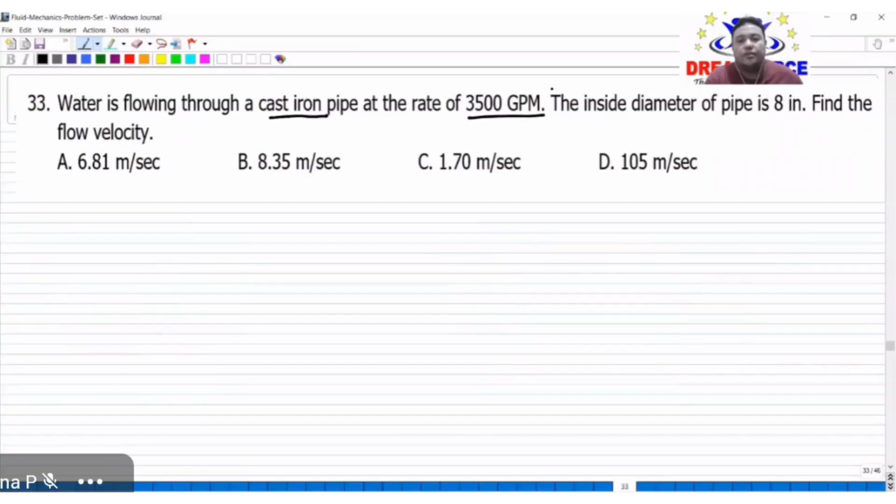Number 33. Water is flowing through a cast iron pipe at the rate of 3,500 GPM.

GPM is your gallons per minute. The inside diameter of the pipe is 8 inches. Find the flow velocity.

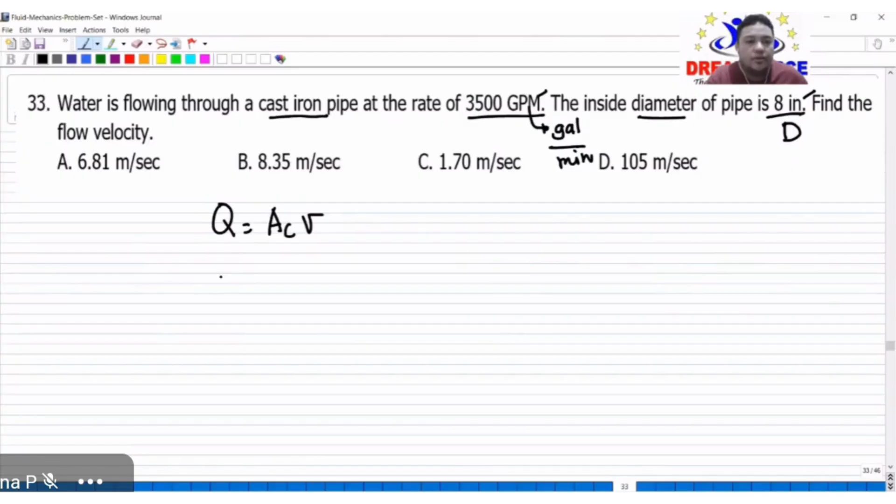Take note, we have discharge and cross-section, which is our diameter, circular. So find the flow velocity. Your Q is equal to cross-sectional area times velocity. In terms of velocity, V is equal to Q over our cross-sectional area.

We want our gallons to become SI. What do we know about gallons? In 1 cubic foot, that is equal to 7.48 gallons. That's our conversion factor. We already know feet to meter, so that's not a problem. Therefore, this is 3,500 gallons per minute.

Let's make this cubic feet first. In 1 cubic foot, that is 7.48 gallons. What else do we need to do? This should become SI. In 1 meter, this is 3.28 feet.

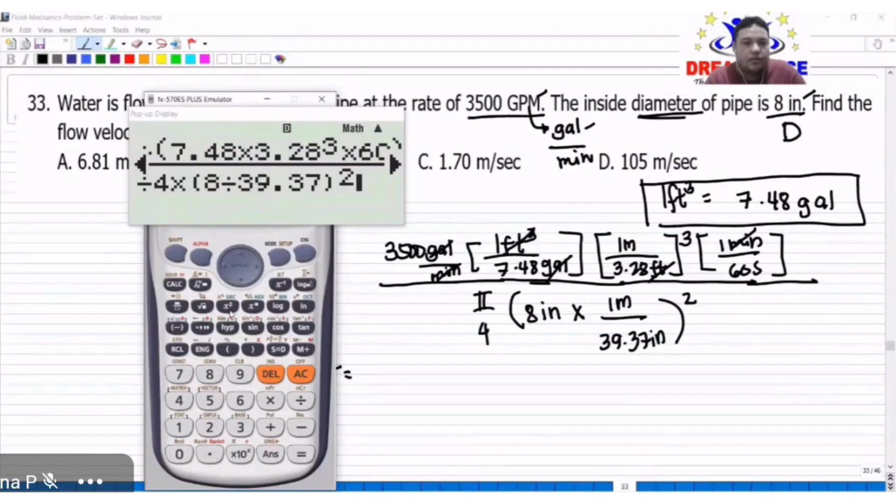All over pi over 4 multiplied by the quantity 8 divided by 39.37. So this is now equal to 6.81 meters per second. That is letter A.

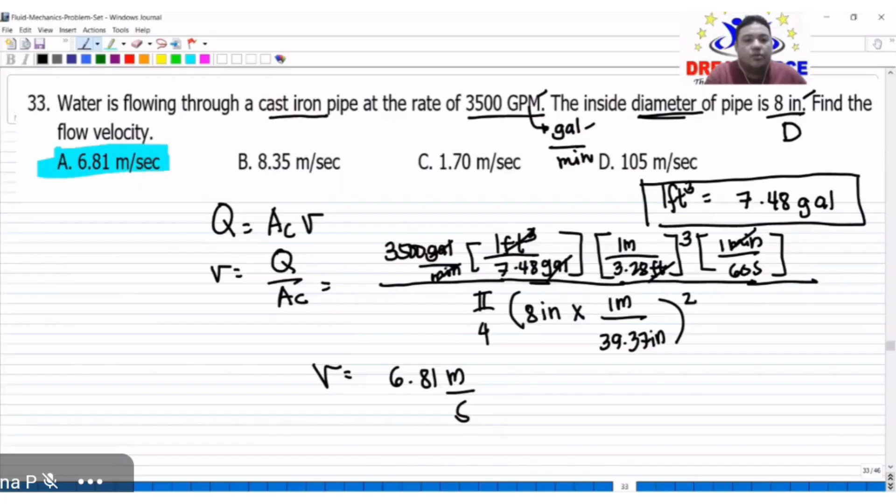Let's move on to the next problem. But before this, let's discuss the concept of head loss. Take note, what we've been discussing is fluids moving in one direction only - there's no change in direction.

But take note, in reality our pipes have many turns and bends. The fluid moves until it reaches its destination, and there are many bends. And take note, when the fluid flows and there's a bend, there is a corresponding friction between the fluid and the bend itself.

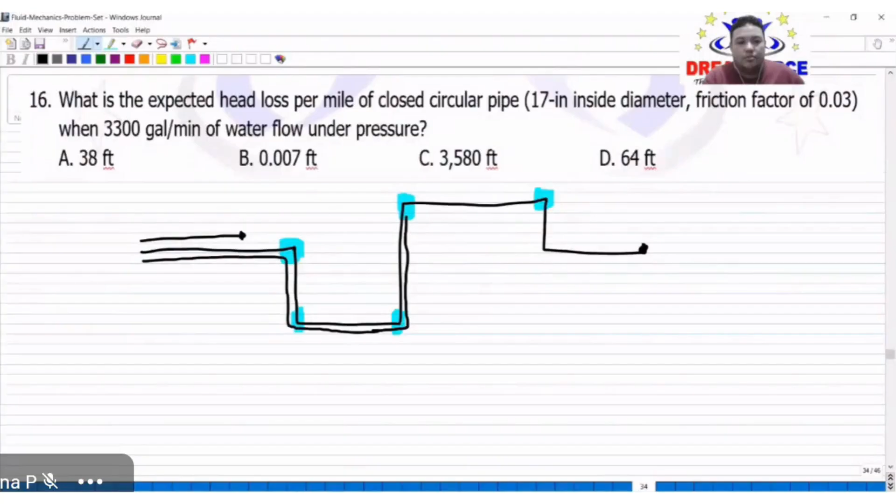So naturally something resists the direction the fluid wants to go. Instead of going straight, it follows the direction of the pipe. Therefore, there is friction here. So the friction, or the energy lost due to the fluid bending, this is what we call head loss - head loss due to friction.

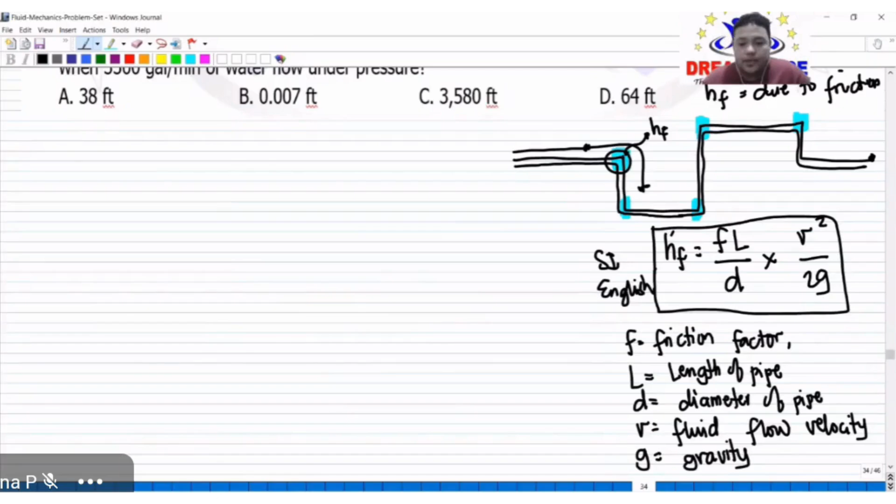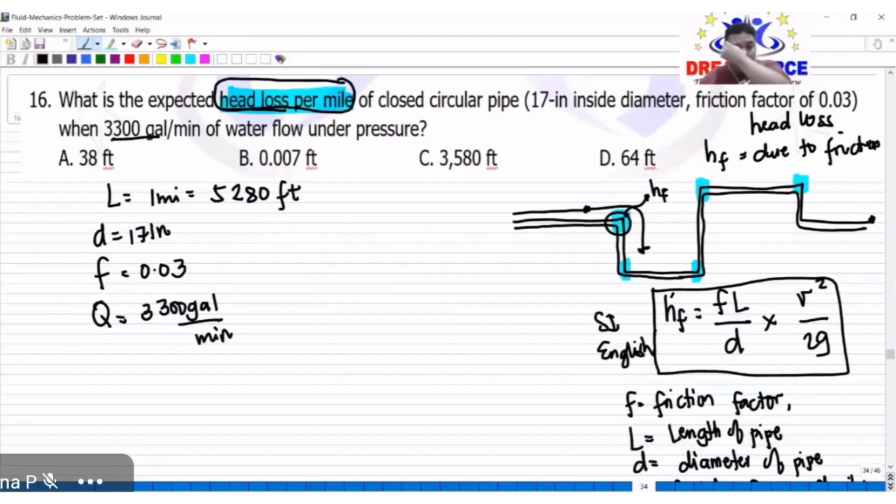What is the expected head loss per mile? Take note, head loss per mile. So from this, we know that we're computing per mile. What is the length of the pipe here? The length of the pipe is 1 mile, or in feet, 5,280 feet, of a closed circular pipe, so D equals 17 inches inside diameter, friction factor 0.03, and our Q, given as 3,300 gallons per minute of water flowing under pressure. So what we're looking for is head loss.

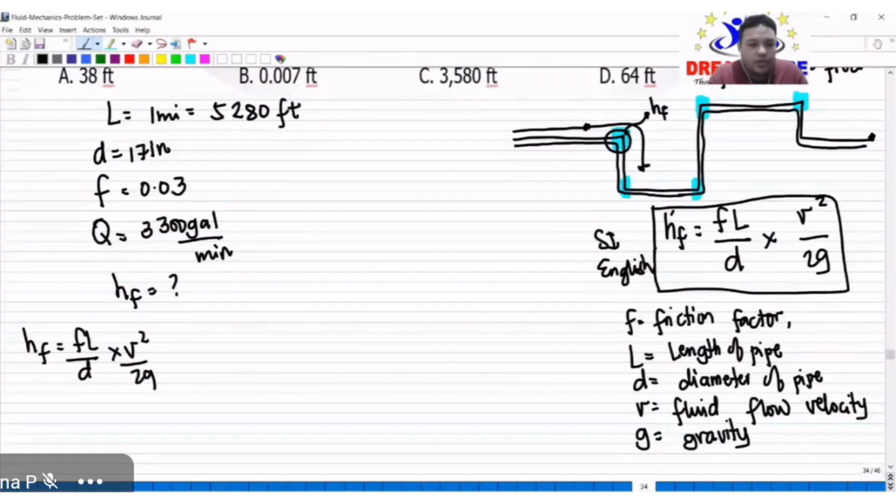What is head loss? That is HF equals FL over D times V squared over 2G.

Let's get HF. This equals friction factor 0.03 multiplied by our length, 1 mile, 5,280 feet, all over our diameter, which is 17 inches. Let's convert it to feet, since our units aren't compatible.

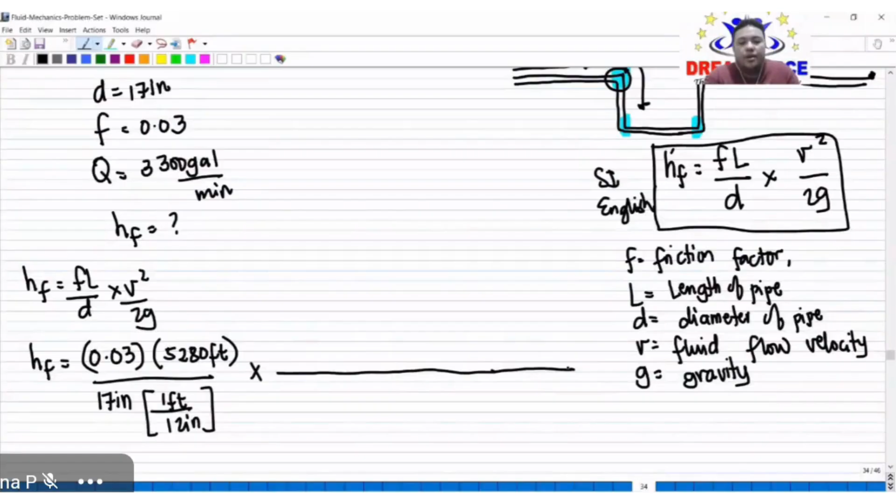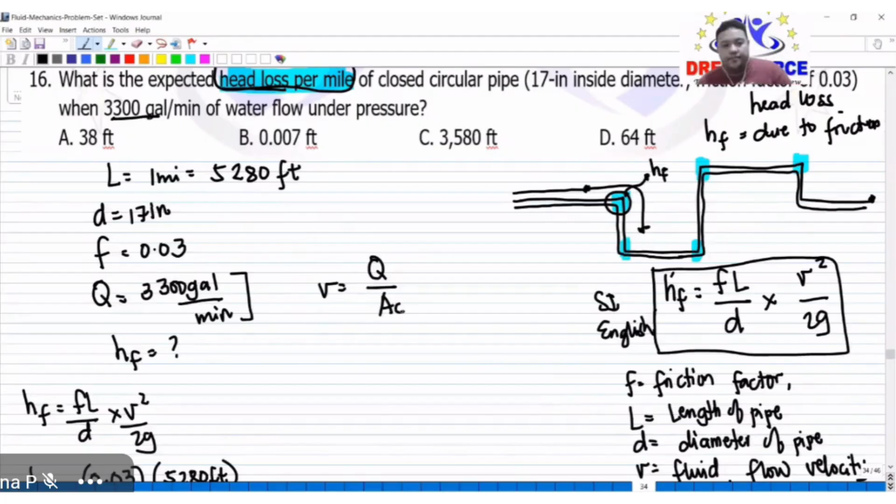Multiplied by the quantity: in 1 foot, that is 12 inches. Multiplied by... we don't have V yet. But take note, where can we get V? What parameter? Discharge. So what is V in terms of discharge? That is Q over cross-sectional area. So our V here is now squared.

We square all of this. So times the quantity - let me enlarge it. This is now multiplied by our Q. But our Q is 3,300 gallons per minute.

This needs to be in English units, so what do we do? We just convert. Multiplied by: in 1 cubic foot, that is 7.48 gallons. Then what else do we do? Convert the minutes to seconds. In 1 minute, that is 60 seconds. So is that discharge now? Cubic feet per second? Yes.

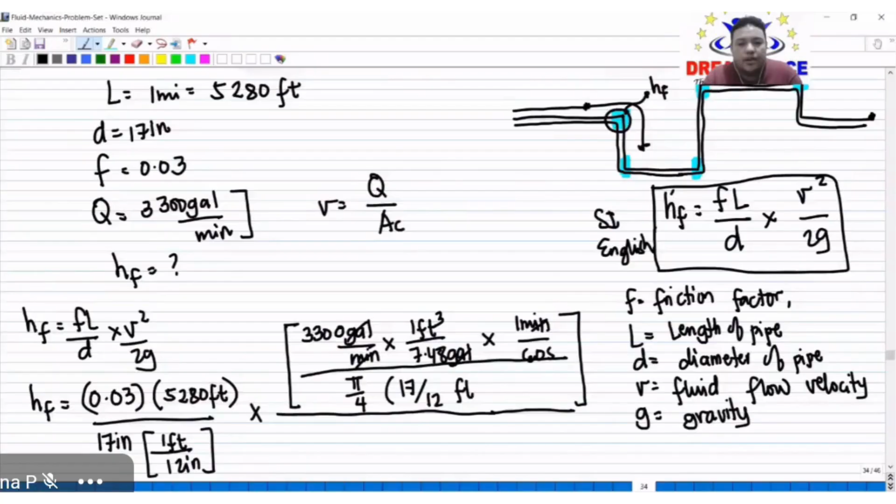That's the unit for discharge now, all over our cross-sectional area. Since it's a circular pipe, area of a circle, that is pi over 4 times d. That is 17 inches, so let's just divide by 12 so it becomes feet right away. This is the quantity squared, and all of this, the quantity squared.

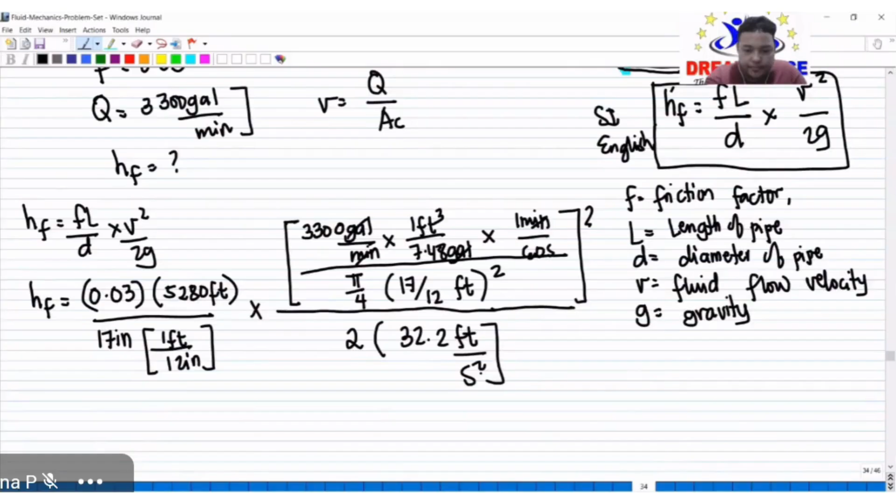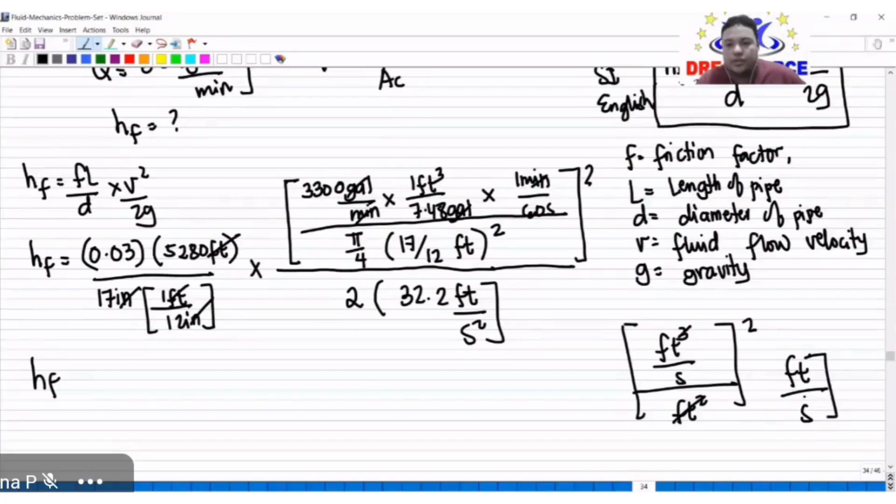All over twice of gravity, which is 32.2 feet per second squared. What cancels? Feet, inches. Take note, we have cubic feet over second, over cubic feet, squared feet, this is the quantity squared. So what happens? Our feet cancels here, feet squared, so what remains is one foot - this is foot per second squared, or just foot per second. This is the quantity squared, so foot squared over second squared. We still have foot here below, foot per second. So what happens, the second squared cancels, so foot squared over foot, leaving just foot, which is the unit for head.

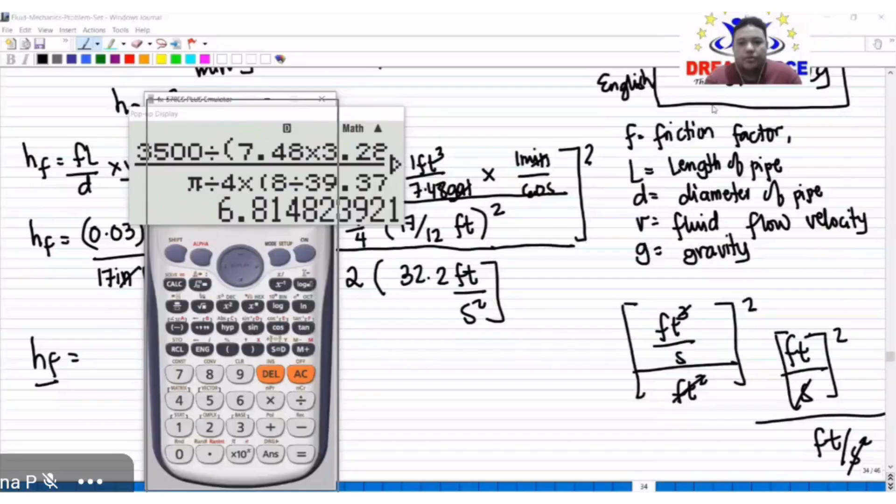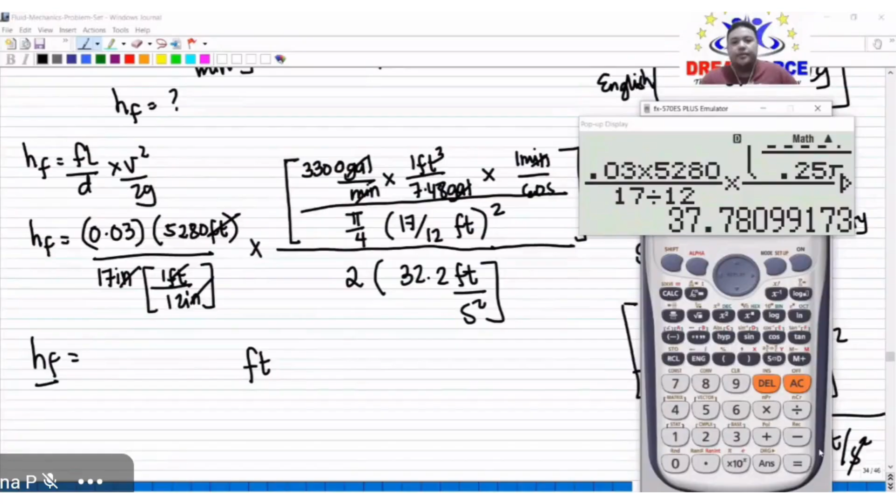So let's compute this: 0.03 times 5,280 all over 17 divided by 12, multiplied by - these are quantities squared - 3,300 divided by the quantity 7.48 times 60, close parenthesis, all in the denominator, over 0.25 pi times the quantity 17 divided by 12, the quantity squared, over 2 times 32.2. The whole numerator is squared. This equals 37.78.

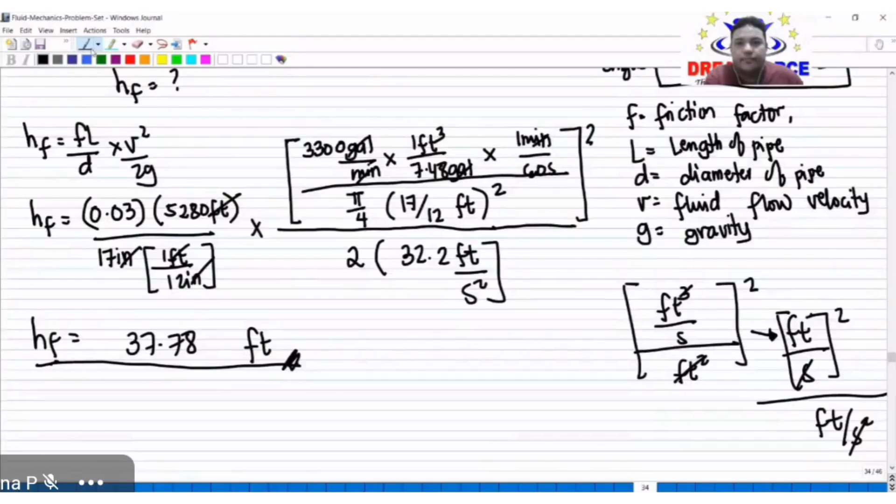This is letter A. So let's move on to the next, number 23.

Oil having a specific gravity of 0.869 - so our SG of oil is 0.869. And dynamic viscosity, that is our mu d, equals 0.0814 Pascal second.

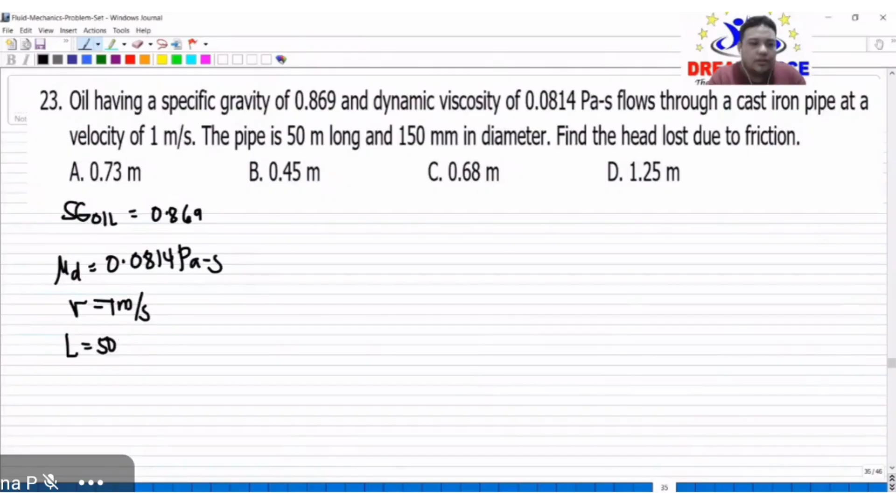So we're in SI units. Flows through a cast iron pipe at velocity V equal to 1 meter per second. The pipe is 50 meters long, so L equals 50 meters, and our diameter is 150 times 10 to the negative 3 meters. So we are going to find the head loss due to friction.

So HF - what is HF? This is HF equals FL over D multiplied by V squared over 2G. We have velocity, we have gravity, we have diameter, we have L, but we don't have friction factor. Where do we get the friction factor? Take note, we have a formula for friction factor.

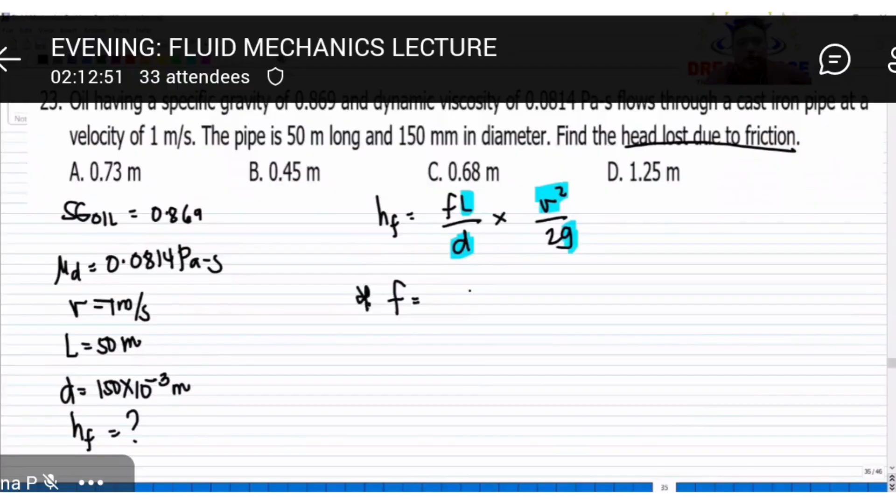Your friction factor equals 64 over your Reynolds number. We know how to get Reynolds number, right? Take note, the given is dynamic viscosity, so our Reynolds number is based on that. This is now equal to V times D times rho over mu d. Therefore, Re now equals 1 meter per second multiplied by our D, diameter, 150 times 10 to the negative 3, multiplied by the rho.

So what is the rho of our oil? How do we get the density of oil? Let's just use specific gravity. So rho of our oil equals SG of oil multiplied by rho of water. That is 0.869 multiplied by 1,000, all over our mu d, which is 0.0814.

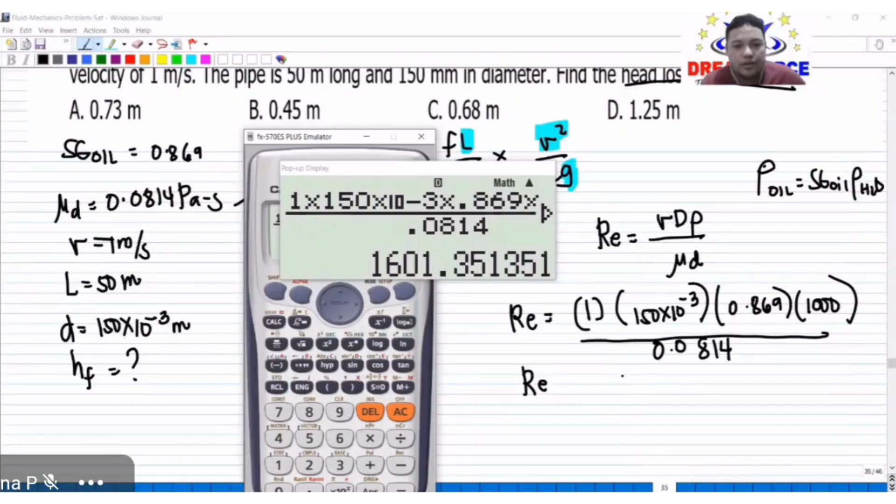Okay, unitless. Okay, pwede na natin makuha yung ating F. So therefore 64 over 1,601.351. So ilan po yung friction factor natin? 64 divided by answer. So this is approximately equal to 0.04.

Okay, pwede na natin makuha yung HF agad. So that is HF is equal to FL over D times V squared over 2G. So this is now equal to 0.04 times the length, which is 50 meter, all over yung D natin, 150 times 10 to the negative 3 meter multiplied by V. So that is 1 meter per second, the quantity squared, all over yung ating 2 times yung ating gravity, 9.81 meters per second squared.

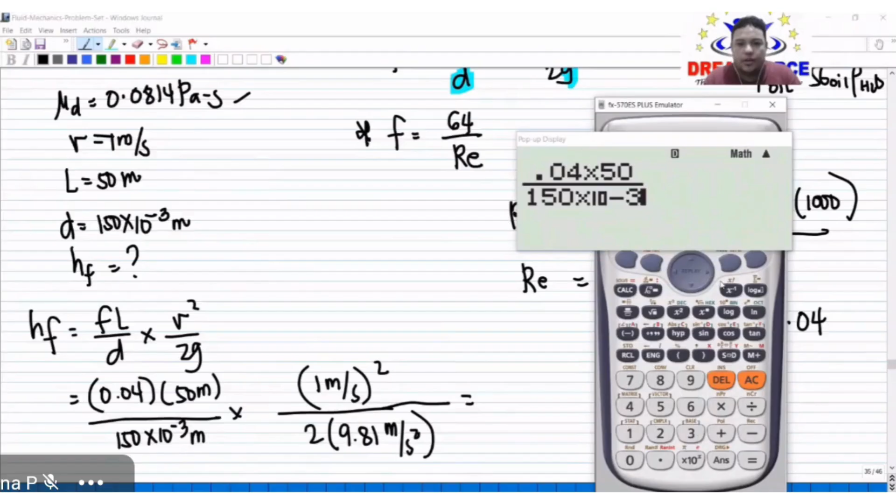So that is 0.04. Another time. 0.04 times 50 over 150 times 10 to the negative 3 times 1 squared all over 2 times 9.81. So this is 0.6795, or that is approximately equal to 0.68 meter.

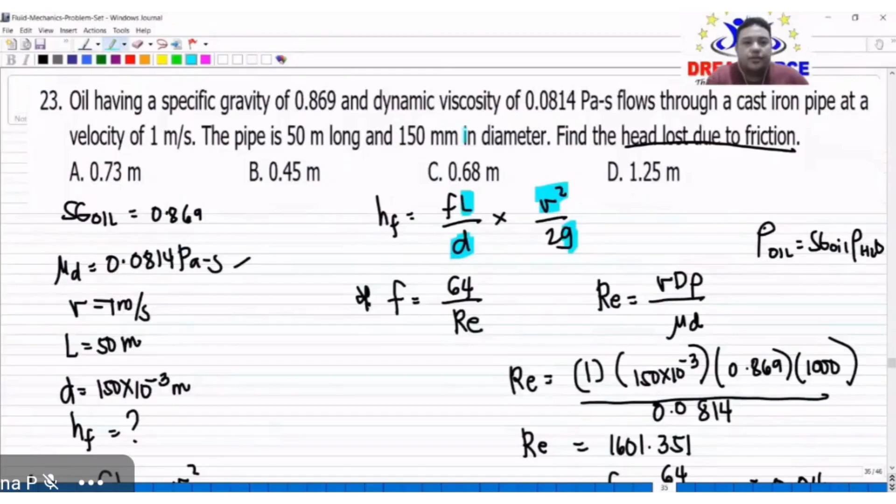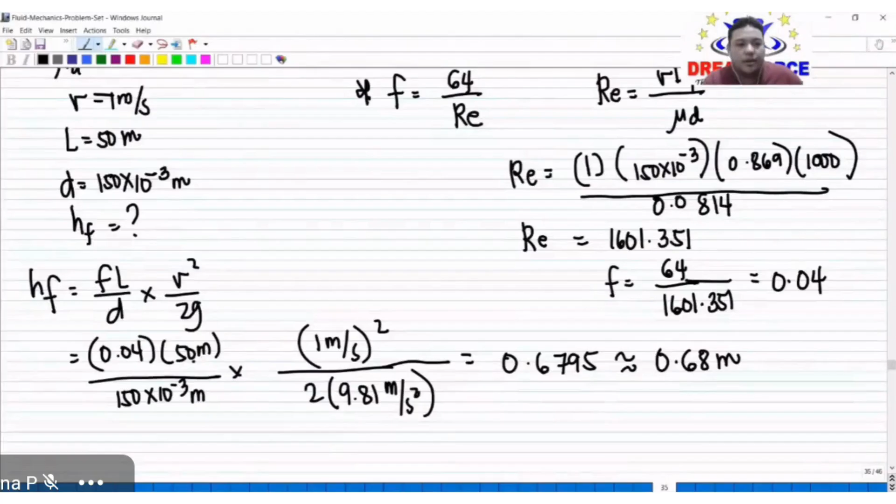Okay? SI naman lahat. Letter C, part 1, then part 2. Take note lang po, bakit meter? Okay, cancel itong meter tsaka meter dito. Meter squared over second squared. Mag-cancel lang yung second squared dyan. May matitirang isang metro dito.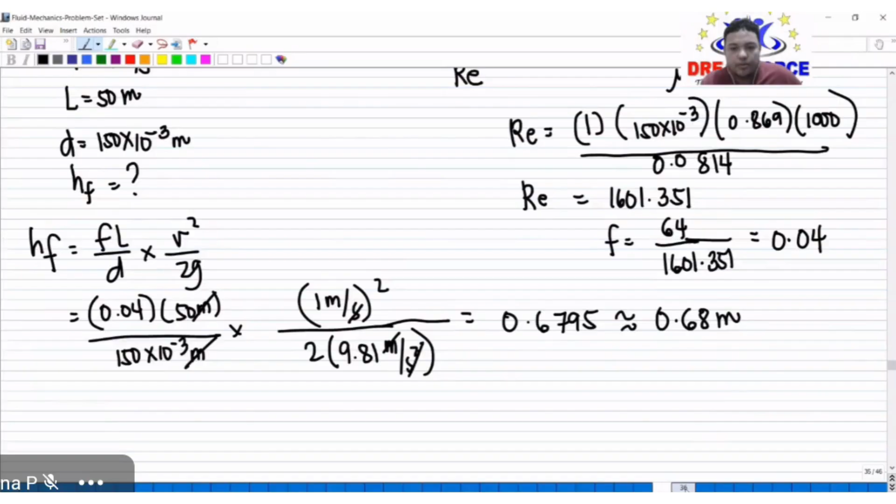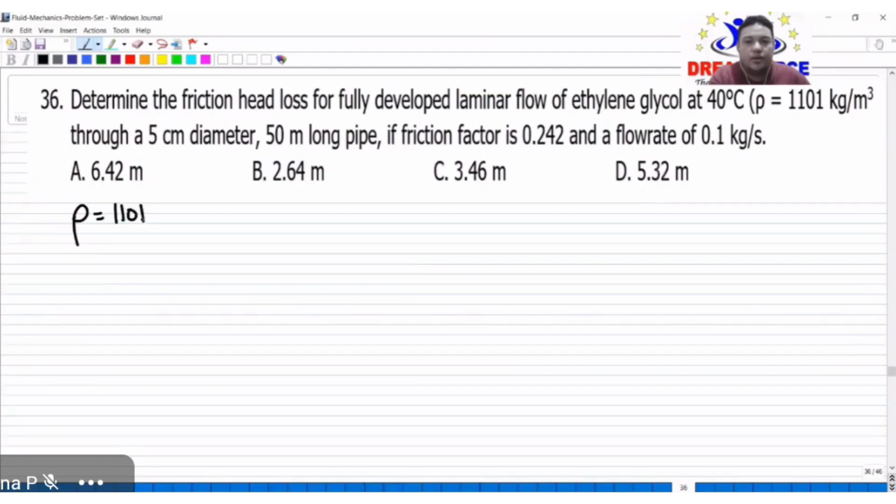Okay, next, let's move on to the next problem. Number 36. So, determine the friction head loss for fully developed laminar flow of ethylene glycol. So, yung ating rho, that is 1,101 kilogram per cubic meter through a diameter d equal to 5 times 10 to the negative 2 meters. So, yung length natin, 50 meter. Friction factor given, 0.242. And yung mass flow rate natin, or mdot, is equal to 0.1 kilogram per second.

So, ano po ba ang head loss natin? Head loss due to friction, that is FL over D multiplied by V squared over 2G. Ano po ba ang F natin? Friction factor, 0.242 multiplied by 50 over D, so this is 5 times 10 to the negative 2. SI naman lahat yan, so lagay na lang natin. Meter, cancel rin yan. Multiplied by yung ating V.

Okay? Meron ba tayong velocity? Wala. Pero meron tayong binigay na mass flow rate. Then, from that mass flow rate, pwede natin makuha yung ating discharge. Siguro, pwede dito yung Q. Ano po ba ang Q? This is equal to AC times V, which is V is equal to Q over your cross-sectional area. Yan naman po yung ginagawa natin dito. So, V is equal to Q over cross-sectional area. Kunin natin yung V.

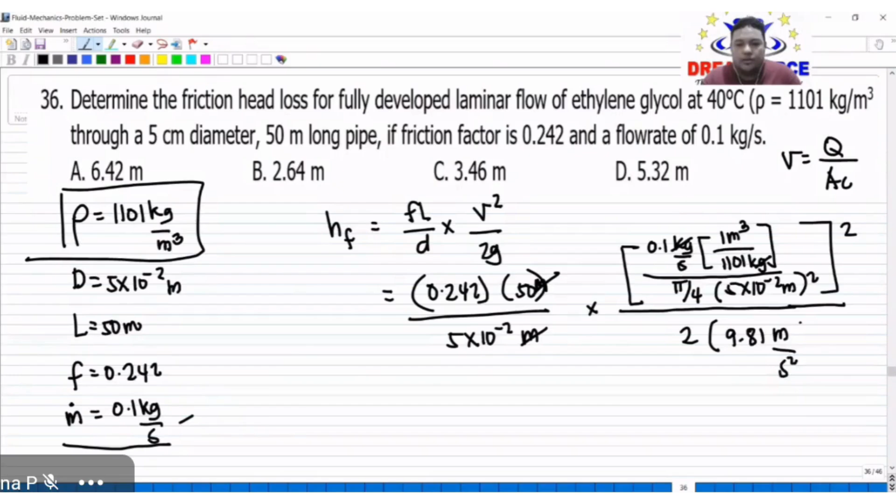So, what is now your HF equal to? That is 0.242 times 50 over 5 times 10 to the negative 2 multiplied by, okay, the quantity squared na to. So, this is 0.1 divided by 1,101 all over 0.25 pi times 5 times 10 to the negative 2, the quantity squared, all over 2 times 9.81. So this is equal to 0.0264.

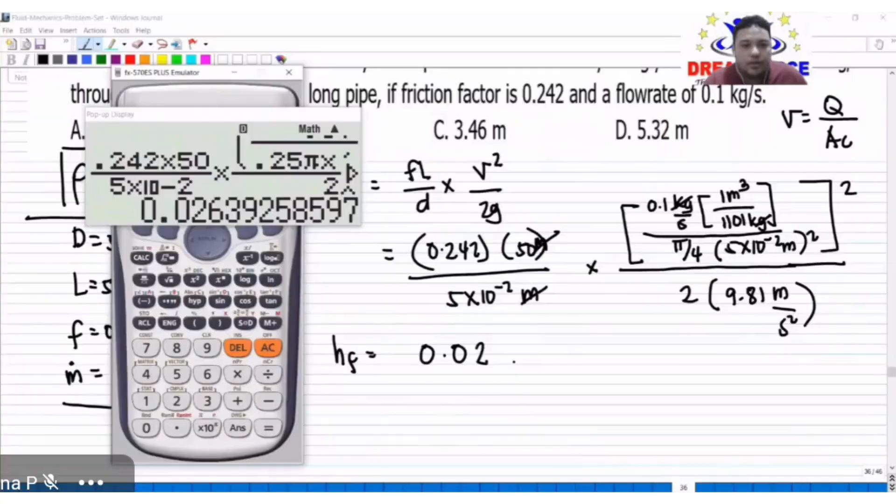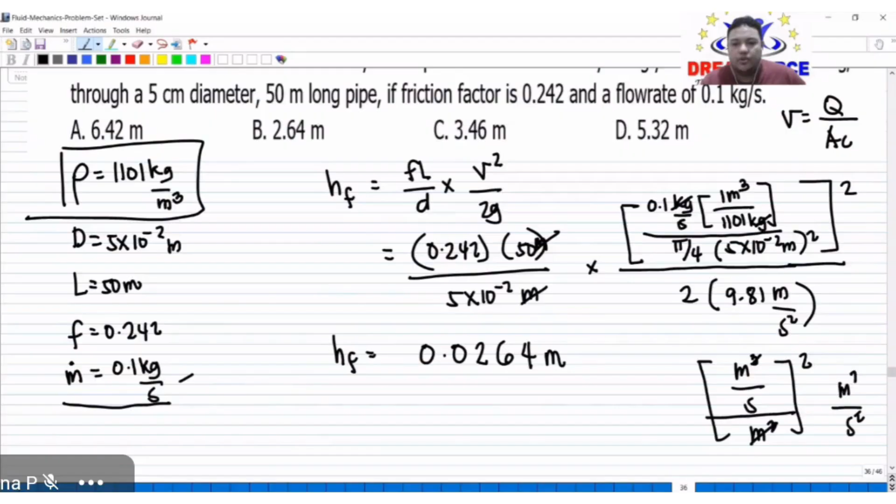Meters. Okay? Bakit meter? Take note po dito, meter cube per second all over meter squared. Na-quantity squared ito, no? Ano mangyayari? Second squared yung nasa baba. Ano mangyayari sa meter? Magka-cancel yung meter squared. May matitirang isang metro. Meter squared rin yan. All over meter per second squared. Cancel, matitira metro. Ganun lang naman kasimple okay?

Unit analysis. Okay? Pero take note po, no? Dito, wala sa choices ito. Siguro yung choices natin is naka-centimeter. So, troubleshoot lang natin, centimeter. Times 100 lang natin. So, this is now equal to what? This is equal to 2.64 centimeter.